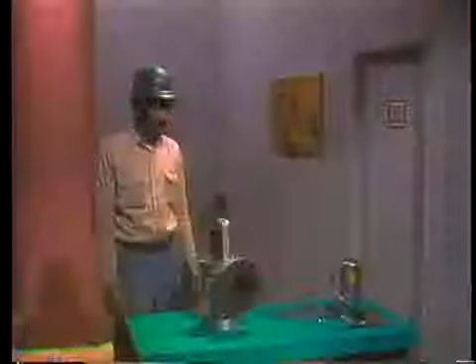Once you've cleaned the valve and gotten together the tools you need, you're ready to begin disassembly. Disassembly starts at the top of the valve with the removal of the hand lifting assembly. The first part to be removed is the pivot pin, which is usually locked in place with a cotter pin.

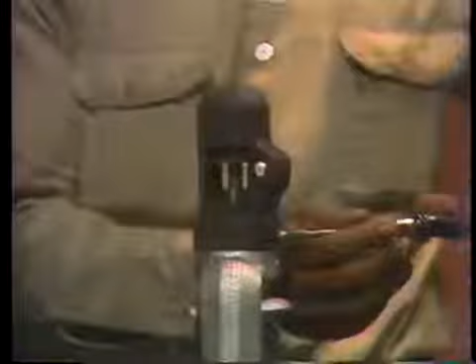As with all the other parts you'll remove in the course of disassembly, handle these parts carefully and set them aside where you can find them later on. Once the pivot pin is out of the way, the lifting lever can be removed. Next comes the cap. The cap protects the top of the spindle, the lifting nut and its lock nut, and the compression screw. It's usually held in place by a set screw.

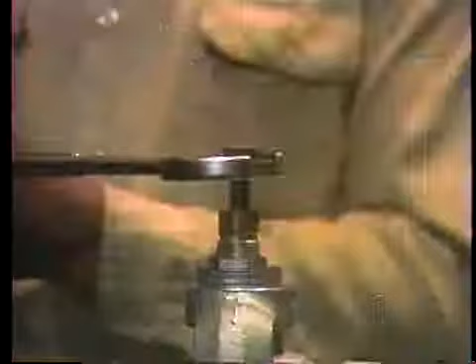At the top of the spindle is a lock nut and the lifting nut. Use a pair of wrenches to break them free. Then, turn them off the spindle and set them aside.

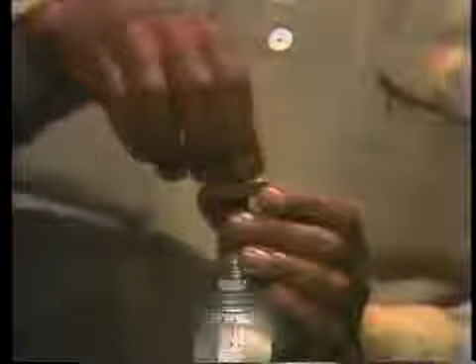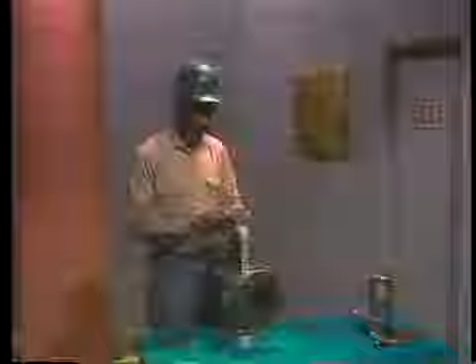The lock nut holding the compression screw in place should be broken free next. Again, use a pair of wrenches, but be certain that the wrenches you use are matched to these parts. Otherwise, you could round off the flats of the screw and its lock nut. It's not necessary to remove the lock nut from the compression screw. Just back it away from the yoke.

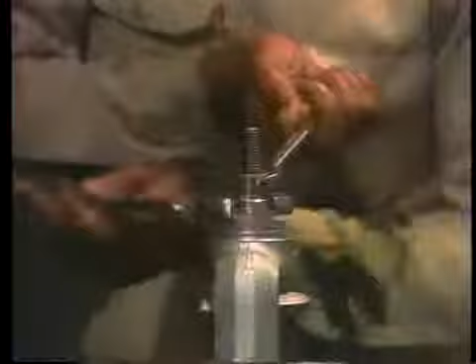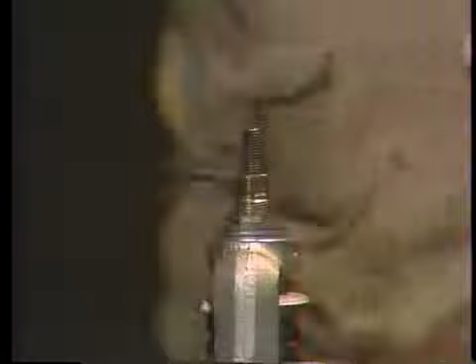Remember that the compression screw is precisely adjusted to maintain exactly the right amount of tension on the valve spring. So that you can return it to its original place when you reassemble the valve, you have to keep a record of its position. One way to do this is to make two small witness marks, one on the top of the yoke and the other on the flat surface of the screw itself.

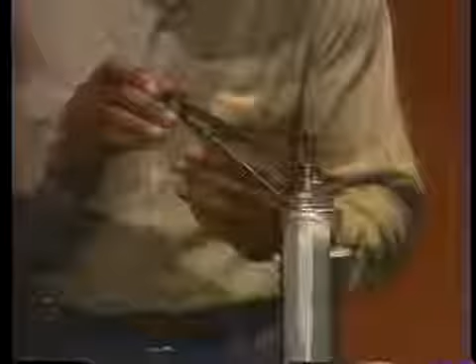By setting a divider so that one tip is in each witness mark, the distance between the tips of the divider becomes your record of the distance between the witness marks. When using this method, it's extremely important to put the divider where its setting won't be changed, either by its falling on the floor or being picked up by another mechanic.

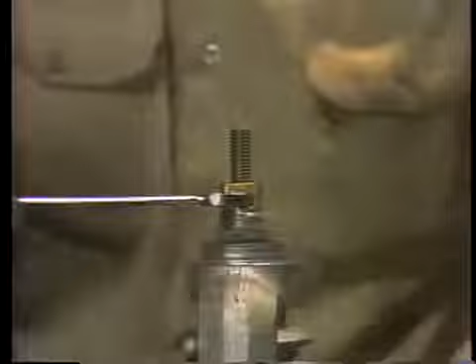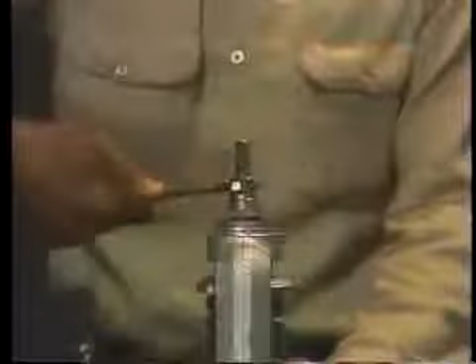To prevent any possible error when installing the compression screw later on, always make a second record of its original position. The easiest way to do this is to count the number of turns it takes to disengage the compression screw from the threads in the yoke. Using the witness marks as a guide, count each time the screw completes a turn.

When the compression screw is loose enough, you can turn it by hand, but continue counting. Each time the witness marks pass each other, count another full turn. Stop counting only when you feel the threads disengage. Then lift the compression screw off the top of the spindle and set it aside. Immediately write down the number of turns it took to free the screw. Don't rely on your memory.

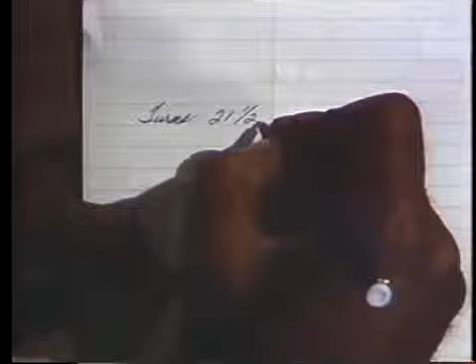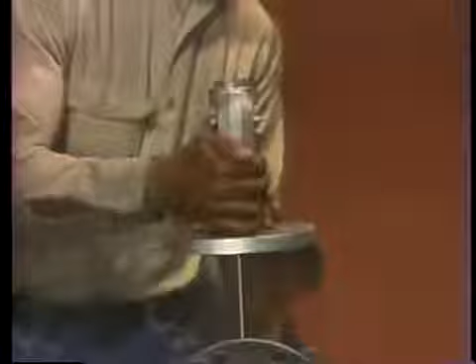Next, break the yoke nuts free and remove them from their studs. When the last nut has been removed, lift the yoke off the valve body. Be careful not to bang the yoke against the studs or the spindle, and set the yoke aside where it's safely out of the way.

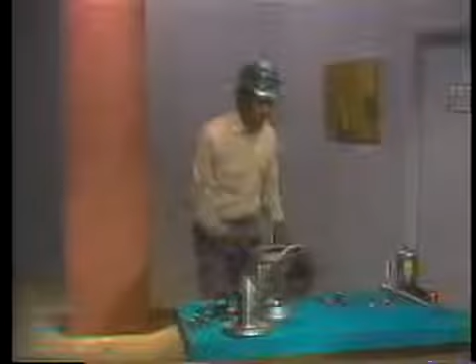At this point, it's a good idea to set up a pair of V-blocks so you have a safe place to put the spindle when you remove it. Remove the spindle and the feather by lifting straight up to avoid banging the feather against the sides of the casing. A feather that's even slightly damaged will not function properly.

Separate the spindle and the feather. Then set the spindle on the V-blocks and place the feather on the table seating surface up so it's not damaged by contact with the table.

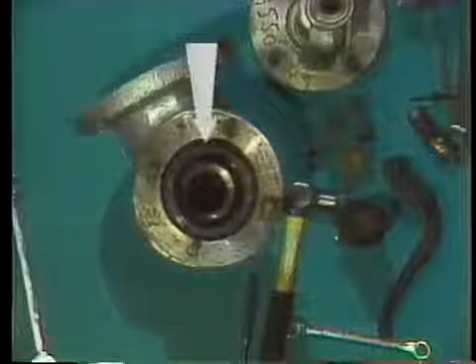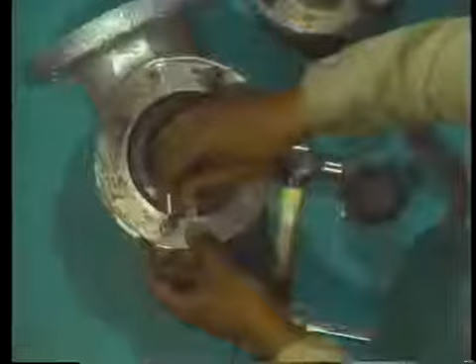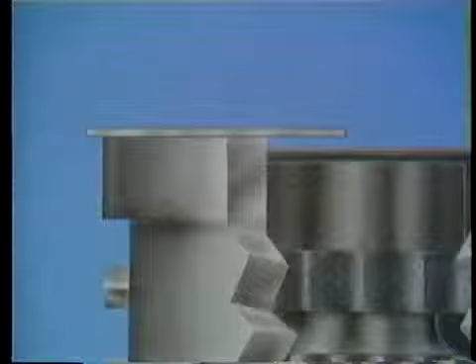A rigid rule is laid across the lip of the valve body. Then a second rule is placed vertically with its end flat against the top of the upper ring. The measurement is taken on the vertical rule at the point where it intersects with the horizontal rule. Using this method, you get an accurate measurement of the distance between the top of the upper ring and the lip of the valve body.

When you get an accurate reading on the vertical rule, write the measurement down. As the mechanic's notes show, the distance between the top of the upper ring and the lip of the valve body is 5/8 of an inch. After recording this first measurement, remove the upper adjusting ring.

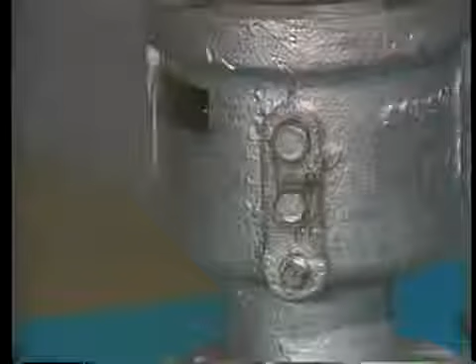This is done by first cutting and removing the locking wire that holds the upper ring and lower ring locking pins in place. The upper locking pin is then broken free and removed from the valve body. This frees the upper adjusting ring, which is removed by simply unscrewing it until it comes free.

Check the ring for any obvious signs of wear or damage. Then set it aside where it won't fall on the floor or get banged around. The next step is to record the position of the lower adjusting ring. Here, the mechanic is using a lapping block, but a rigid rule will work just as well as long as it's perfectly straight. He lays the lapping block flat on the valve seat.

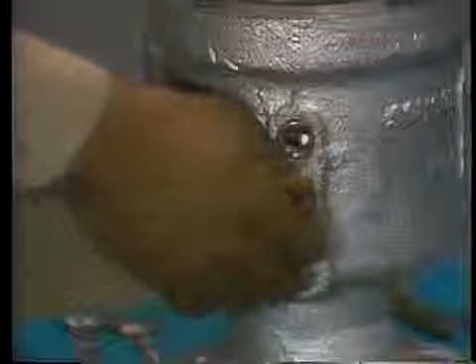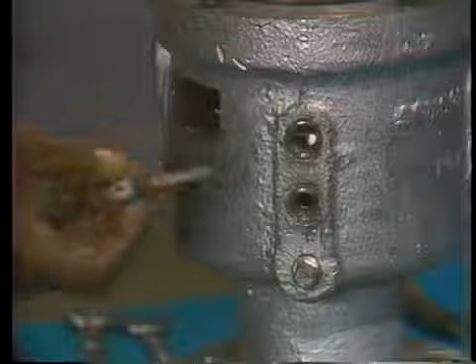Then he breaks the lower adjusting ring locking pin free and removes it from the valve body. This frees the lower ring so that it can be turned. Next, the mechanic uses a screwdriver to reach into the valve body through the lower locking pinhole.

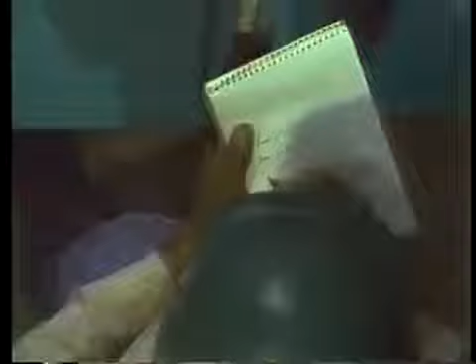Looking through the top of the valve, we can see that he's using the screwdriver to turn the lower ring. He carefully counts the number of notches that move past the pinhole as the ring turns. When the lower ring touches the lapping block, he stops. He immediately writes down the number of notches that he counted, in this case, 10. This gives him the information he needs for reinstalling the lower ring in its original position later on.

He then removes the lapping block and turns the lower ring until it disengages from the threads in the valve body. He removes the ring, briefly inspects it for obvious signs of wear or damage, and sets it aside.

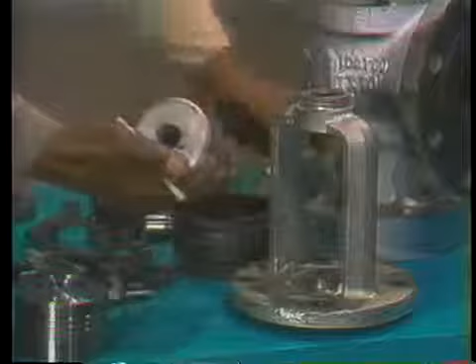All that remains now is to remove the spring and the spring washers from the yoke. This is done very simply by tilting the top of the spring outward. A quick inspection will tell you whether or not these parts are in good condition. The spring and the washers are a match set. This one is brand new and its parts are clean.

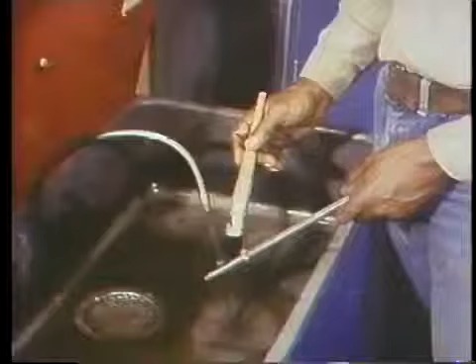When you're doing safety valve maintenance, the step after disassembly will be cleaning all the parts thoroughly. This can be done at a cleaning station using solvent and a brush, or it can be done by dipping each part directly into solvent. In either case, be certain to use a solvent recommended by the manufacturer and get all the parts as clean as possible. Clean parts are easier to inspect and they fit together better when you reassemble them.

After cleaning, inspect each part carefully. The 4 parts that deserve the most careful inspection are the feather, the seat, the adjusting rings, and the spindle. Let's consider each one in turn, identifying some common types of damage you're likely to see, and discussing what to do when you find a part that's worn or damaged. We'll start with the feather.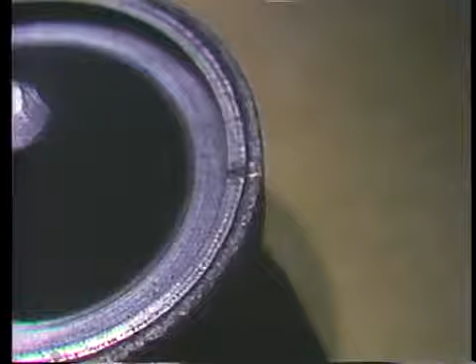When inspecting the feather, the first thing to look for is cracking. Even the smallest cracks are serious, and a cracked feather must be replaced with a new one. Steam cutting is another common problem with feathers. If the damage is this bad, your supervisor will probably recommend that you replace the part. If the steam cutting is relatively minor, you can usually restore the damaged surfaces by lapping them.

Because this feather is flat, it can be lapped on a lapping plate. A layer of lapping compound on the plate provides the abrasive required to restore the surface of the feather. If the damaged feather is round or cone-shaped, it can't be lapped the way a flat feather is. Your text gives information on how to repair feathers of various shapes.

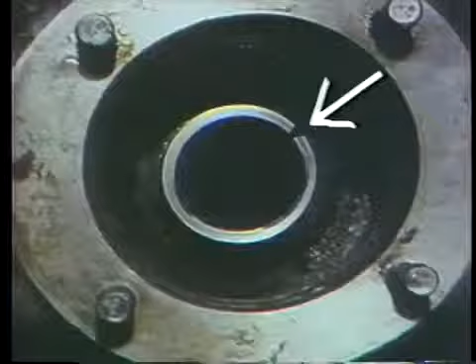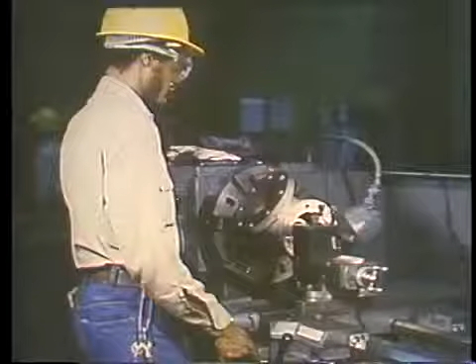Another part of the valve that's subject to cracking and steam cutting is the seat. As we saw during disassembly, the seat in this safety valve is a permanent part of the valve body. If it were damaged as seriously as the one you see here, you'd have two choices. You could use a special tool specifically designed to restore the damaged surface, or you could mount the valve in a lathe and remachine the seat. Both procedures are discussed in your text.

If the seat has only minor damage, lapping is the best solution. Lapping a seat requires special care, so let's take a few minutes to watch the mechanic demonstrate the proper procedure. Just keep in mind that the seat in this valve is flat and a part of the valve body. The procedures for lapping other types of seats can be found in your text.

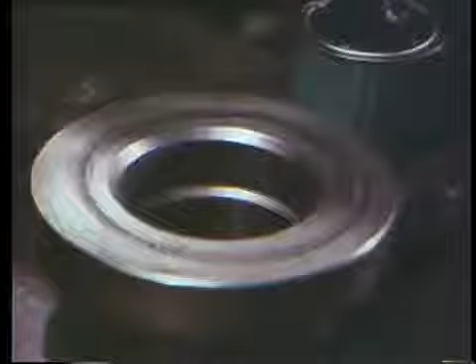To begin, he needs a lapping block and one or more types of lapping compound. Because the valve is new and this is only a demonstration, he'll use a very fine lapping compound. If the seat were actually steam cut or nicked, he would use more than one type of lapping compound. He'd begin with a coarse compound to quickly remove most of the damaged metal. Then he'd use progressively finer compounds to ensure a flat surface. He begins by putting a few dabs of compound on the face of the block.

Then he places the block on the seat and begins lapping. The abrasive compound between the block and the seat wears down the surface of the seat so that it conforms to the perfectly flat surface of the block. It's not necessary to exert any downward pressure on the block, but it is necessary to move the block in a smooth, regular motion. As you can see here, the mechanic alternates between a figure-8 motion and a circular motion.

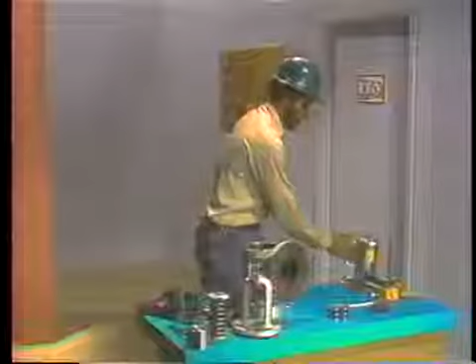When he feels that he's achieved a smooth, flat surface, he removes the lapping block and cleans the compound off of it. He then uses solvent to rinse the compound off the seat and other internal surfaces of the valve. He wipes away all remaining residue with a clean cloth.

A flashlight helps him to inspect the seat for any nicks or uneven spots. If his inspection showed any irregularities, he'd have to continue lapping until they disappeared completely. Now, there's one thing to keep in mind, regardless of what type of seat you're lapping. Because the lapping process removes metal from the seat, it's likely to change the set points of the valve. So, when you reassemble the valve, you'll probably have to compensate for this change by adjusting the compression screw and the adjusting rings. Again, you'll find more information about this in your text.

Okay, that covers inspection and certain types of maintenance of the feather and the seat. Now, what about the adjusting rings and the spindle? Well, the adjusting rings are subject to nicks, cracks, and steam cutting just as feathers and seats are. But such damage is less likely in adjusting rings. Nonetheless, the rings must be inspected carefully to ensure that they won't fail during normal valve operation. If you find a ring that's damaged, it's usually best to replace it.

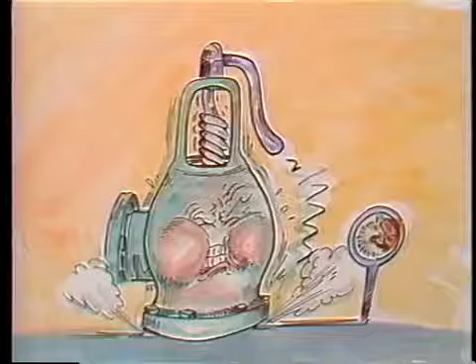That brings us to the spindle. The spindle is among the most critical parts of the valve. It's also one of the most likely to be damaged. The most common type of damage to the spindle is bending, caused either by careless handling or by system pressure pushing upward when the valve opens. A bent spindle can lead to a serious valve malfunction. It can prevent the valve from opening, or it can prevent open valves from reseating when system pressure drops back to normal.

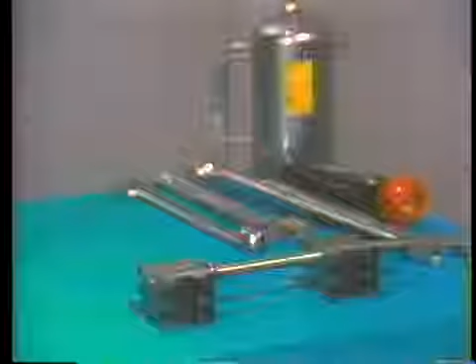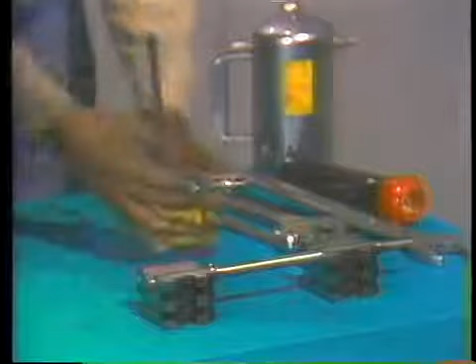During disassembly, the mechanic put the spindle on a pair of V-blocks, so he already has a head start on setting up for the test. The instrument he'll use is a dial indicator mounted on a magnetic base. He sets the base beside the spindle and secures it in place. He presses the stem of the indicator against the surface of the spindle until the stem retracts about 1/4 of its length. He then sets the indicator so that it reads 0. Zeroing the indicator gives him a reliable reference point for taking the reading.

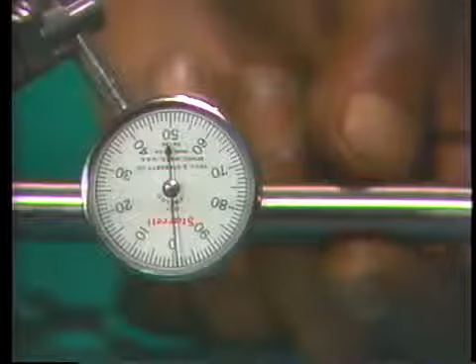Being careful not to bump the spindle or the indicator, he rotates the spindle very slowly, keeping his eye on the dial. Any change in reading indicates an irregularity in the shape or the straightness of the spindle. In this case, he gets a runout reading of about 1 1/2 thousandths. The spindle is slightly bent, but it's still within tolerances. This spindle, then, can be reinstalled in the valve, but if it didn't meet specifications, it would have to be replaced. And before a new spindle is installed, its runout must be checked to be certain it's within specifications.

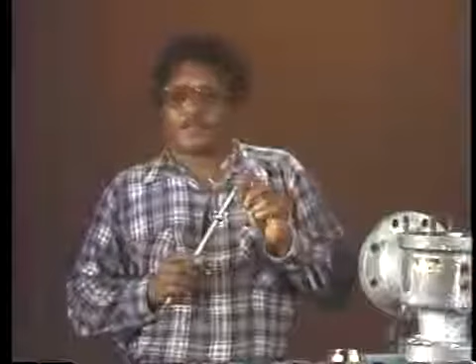Of course, the spindle should also be inspected for cracks and other signs of damage. It's especially important that the end that fits into the feather be smooth and round. You see, this end acts like a ball bearing inside the feather, enabling the spindle to adjust when the feather lifts unevenly. Flat spots on this end can cause uneven contact and unwanted friction between spindle and feather.

In this segment, we've looked at 4 important parts of a safety valve. We've seen some types of wear and damage that you should be on the lookout for, and some procedures to follow to correct such problems. But don't get the idea that the feather, the seat, the adjusting rings, and the spindle are the only parts of the valve that require careful inspection and maintenance. They're not.

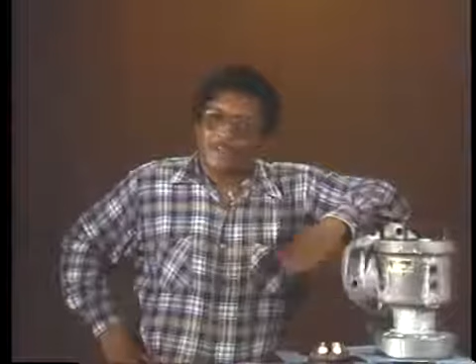For a valve to function properly, every part has to be in top working order, and the only way to make sure of that is to inspect each part and inspect it carefully. So, before we go on to reassembling this valve, turn off the tape and read section 3 of your text. There's a lot of information there that's essential for you to know.

Now, reassembly is basically disassembly in reverse. Since the lower adjusting ring was the last part removed, then it's also the first part to be reinstalled. The mechanic starts by lubricating the internal threads. He uses a brush to ensure an even coat of lubricant and to work the lubricant into the threads.

He then positions the ring so that its threads engage the threads on the outside surface of the seat. He carefully screws the ring down around the seat, turning it until the upper rim of the ring is just about flush with the upper rim of the seat.

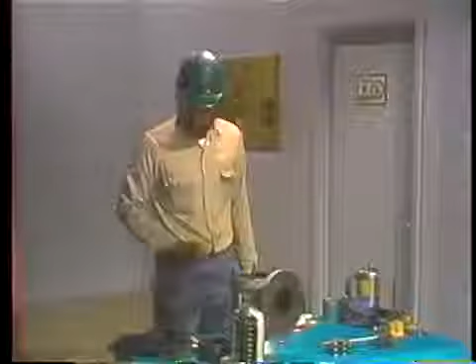To set the ring in its original position, he uses the lapping block as a reference point, just as he did during disassembly. He first cleans the surface of the lapping block with a clean rag. Then he lays it flat on the seat, adjusting the ring as necessary to ensure full contact between the lapping block and the seating surface.

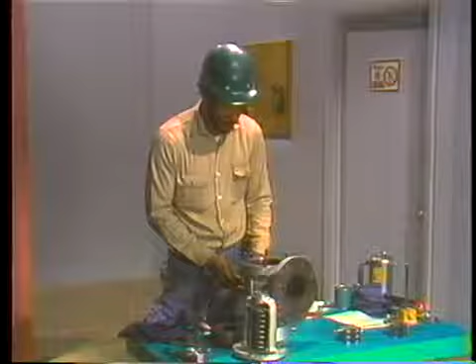Next, he checks his notes. His notes tell him that he must turn the lower ring 10 notches below the level of the lapping block. Knowing this, he inserts a screwdriver through the hole for the lower adjusting ring pin and turns the ring counterclockwise until it touches the block. This gives him his starting point for turning the ring clockwise 10 full notches.

Before doing anything else, he must lock the lower ring in position with a locking pin. He lubricates the threads on the pin. Then he turns the pin into the casing as far as it will go. A wrench helps to tighten the pin into the notches on the ring. Now he removes the lapping block and checks the lower ring to be certain that the pin is holding it in position.

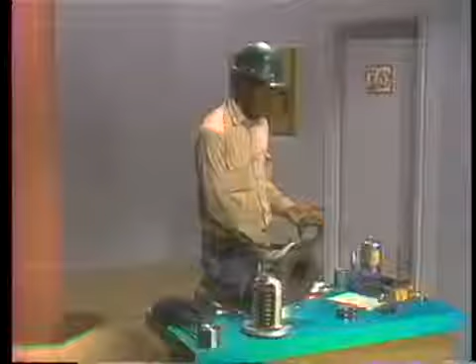The upper adjusting ring is installed next. As with the other threaded parts of the valve, the threads on the upper ring are thoroughly lubricated to prevent binding or corrosion. Then, the ring is installed in the valve body.

Notice that he first turns the ring counterclockwise. This helps him to mate the threads on the ring with the threads in the valve body. Once the threads engage, he turns the ring clockwise so that it threads downward into place. Of course, turning the ring like this only places it in approximately its original position. To be certain the ring is positioned exactly, the same measurement that was taken during disassembly must be repeated now.

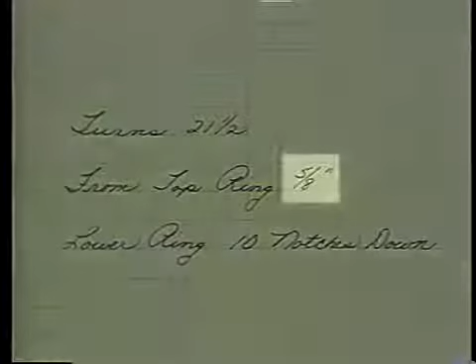The mechanic checks his notes. For the upper ring to be in its original position, its rim must be exactly 5/8 of an inch below the lip of the valve body. To repeat this earlier measurement, he places one rule across the lip of the valve body and places a second rule vertically so that its end lies flat against the top of the ring.

His first measurement tells him that the ring is too close to the top of the valve body, so he turns the ring clockwise to lower it. He then repeats the measurement. Obviously, the ring is still too close to the top of the valve body.

As you can see, positioning the upper ring is largely a matter of trial and error, but no matter how many tries it takes, don't settle for a near miss. Installing the ring in its original position is essential for reliable operation of the valve. Bullseye, 5/8 of an inch exactly.

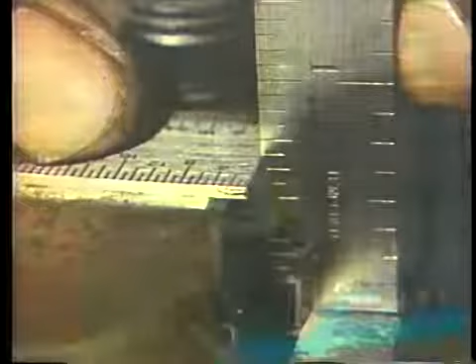To keep the upper ring in place, he installs the upper adjusting ring pin. As with the lower pin, he first lubricates the threads. Then he inserts the pin as far as it will go into the valve body, and uses a wrench to tighten the pin into the notches on the ring. As a final check, he tries turning the ring to be certain it's locked in place.

The spindle and the feather are assembled next. As we mentioned earlier, the tip of the spindle is designed to allow it a certain amount of side-to-side motion when inserted in the feather. To minimize friction between the tip and the inside surface of the feather, lubrication is essential.

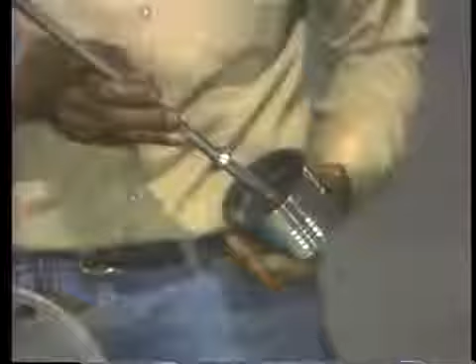And once the spindle is screwed into the feather, it should be wiggled back and forth to make sure the movement is smooth and easy.

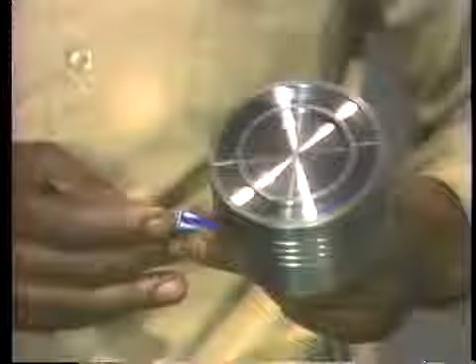Before the feather and spindle are installed, contact between the feather and the seat must be checked. This is done by applying a thin layer of Prussian blue to the seating surface of the feather. The bluing should be applied evenly around the entire seating surface. Any excess must be wiped off before the test is made.

The feather is then inserted into the valve so that it seats properly. To prevent damage to the spindle, only minimum downward pressure should be exerted. When the feather is removed, this is what you should see: a thin, uniform ring of blue around the lip of the seat. It indicates that the feather and seat match perfectly and there is no chance of leakage between them.

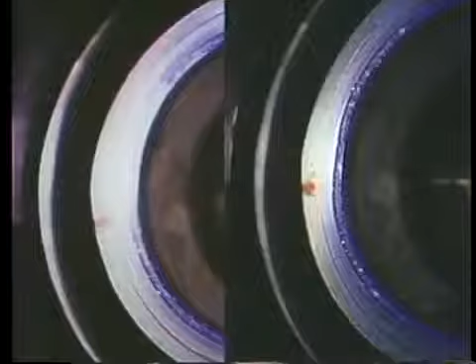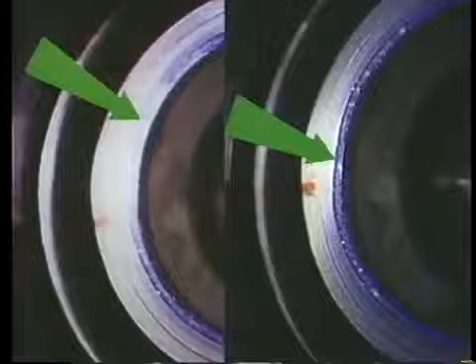If you see a pattern like one of these, where the ring of blue is interrupted, even if the interruption is as small as indicated here, you'll know that the feather and seat do not fit together correctly. Additional lapping of the feather, the seat, or both is required.

In this case, though, the mechanic finds that the feather and the seat match perfectly, so he can go on with the reassembly procedure. First, of course, he cleans the Prussian blue off the feather and the seat. This ensures metal-to-metal contact between the two parts. He then carefully sets the feather and the spindle into position.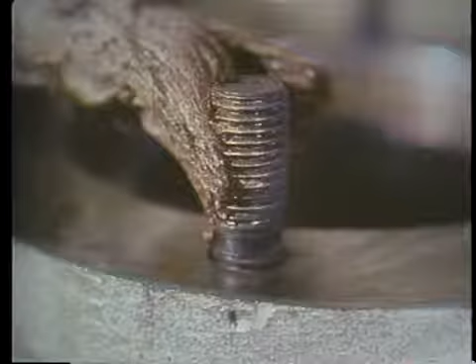Next comes lubrication of the studs that secure the yoke to the valve body. When these lubrication steps are completed, the yoke is set in position on the valve body. Extreme care should be used so as not to damage the spindle or the studs by banging the yoke against them. The nuts are then put on the studs and tightened with a wrench.

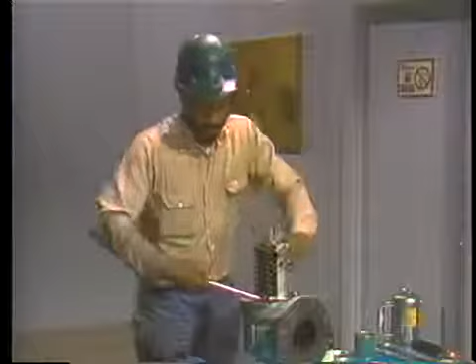Remember to tighten the nuts in an opposition pattern. That is, tighten one nut, then the one directly opposite it, then the third nut, and the one opposite it. This ensures even contact between the valve body and the yoke. The yoke is now secured in position.

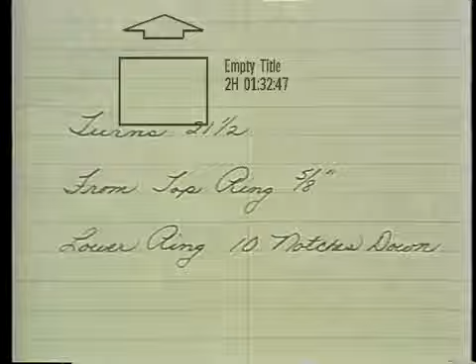This brings us to another critical point of the reassembly procedure: installing the compression screw. The threads of the compression screw are thoroughly lubricated. But before the screw is installed, the mechanic checks his notes. His notes tell him exactly how many turns are required to put the screw back in its original position. In this case, 21½ turns.

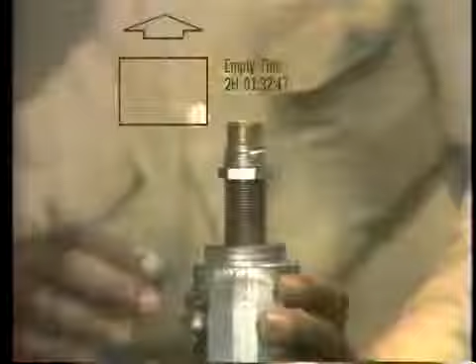He slips the compression screw over the end of the spindle and into position at the top of the yoke. He carefully lines up the yoke and the spindle so that the screw fits properly. Then he turns the screw until he feels the screw threads engage the threads in the yoke. This gives him a starting point for beginning his count.

The witness marks he made earlier help him to keep track of the number of turns. Each time the witness marks pass each other, he counts 1 turn. He continues counting even when he can no longer turn the screw by hand and must use a wrench. To be certain the screw is in exactly the right position, he uses the divider that he set earlier. If the tips of the divider fit precisely into the witness marks, he knows that the compression screw is where it should be.

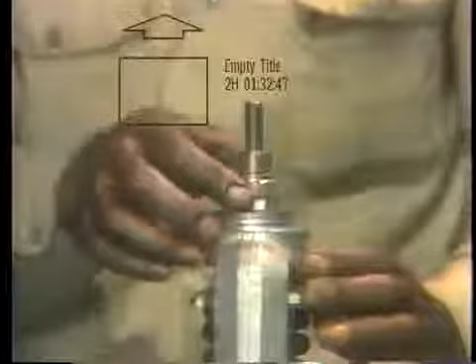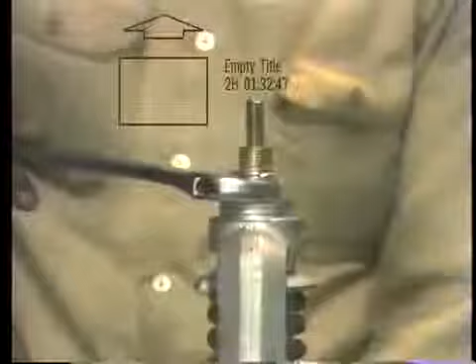He then tightens the compression screw lock nut against the yoke. The lock nut prevents the screw from moving during normal valve operation. Notice that when tightening the lock nut, he uses a second wrench to hold the compression screw in place. He doesn't want the screw to move even a partial turn.

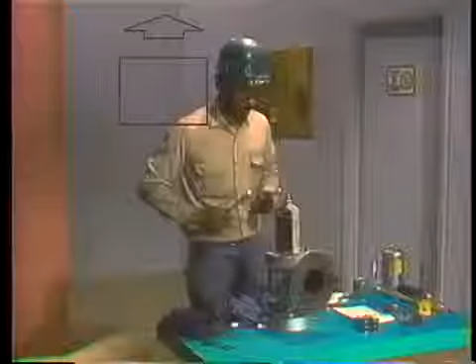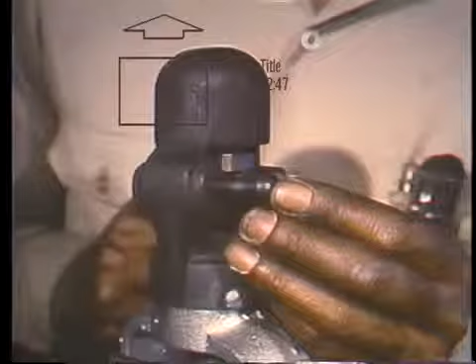When the lock nut is secure, he reassembles the hand lifting assembly and installs the protective cap. He first lubricates the threads at the top of the spindle. He turns the lifting nut into place. Then he installs and tightens the lock nut. Next come the protective cap, the hand lifting lever, and the pivot pin that holds the hand lifting lever in place and enables it to move up and down.

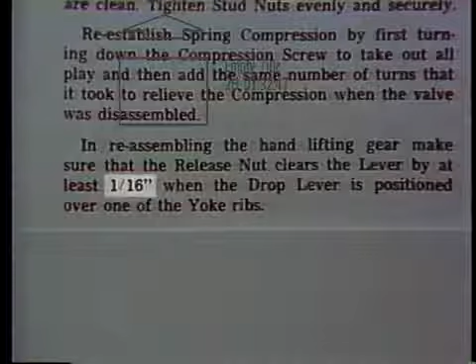Before securing the pivot pin or protective cap in position, he checks the amount of play between the lever and the lifting nut. By inserting a taper gauge between the lever and the nut, he measures the distance between the parts. The gauge tells him that he has about 1/16 of an inch between the lever and the lifting nut. This is well within the manufacturer's specifications.

So he tightens the set screw that holds the protective cap in place on the yoke and installs the cotter pin that holds the pivot pin in position. All that remains now is to attach the lock wire to the adjusting ring locking pins. The wire is first threaded through the hole in the head of the lower pin. Then the wire is twisted together to form a single strand.

Next, one free end of the wire is fed through the hole in the upper pin. Again, the ends are twisted together to form a single strand. To lock the wire in place and to serve as a signal that the rings are properly set for operation, the metal clip on the end of the wire is secured around the wire close to the lower pin. Squeezing the clip with pliers locks it in place.